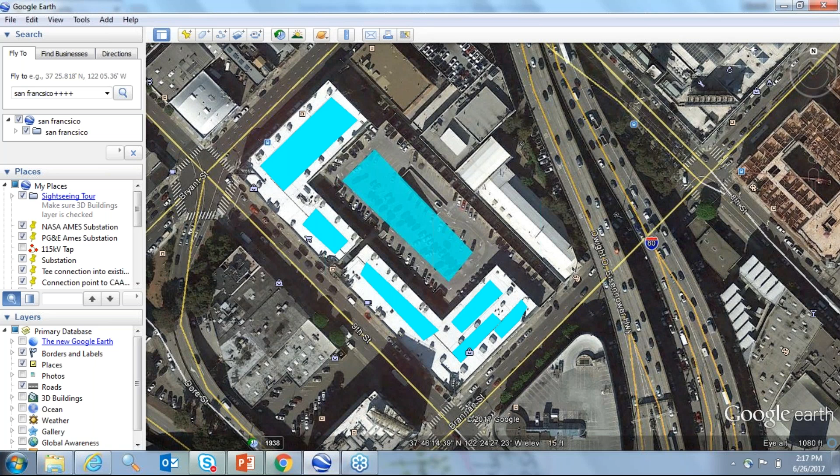So back to the tool, I picked an office building here in San Francisco. So I pre-measured this roof, and it's about 6,500 square feet of total space, but we can fit 3,000 square feet of PV space here. So I simply enter 3,000 there. And I've done the same on the parking lot, and we have 5,000 square feet of suitable PV.

So the next thing we need to put into the tool is, how long do I want this facility to be off-grid for? So how long of a utility outage am I designing for? A lot of the work we've done in San Francisco has been based on seismic issues. And typically, PG&E, the local utility here in Northern California and San Francisco, has done extensive studies to figure out, if the big earthquake happened, so if 1906 was repeated, with the current systems, how long would it take to restore power to San Francisco?

So the results from that survey and that work: it takes between 1 and 7 days for most people to have power restored. So after 3 days, 60% are restored, and after 7, 97% of the city is restored. So that's very different to gas on the West Coast. Seismic is our risk here, and if there's a seismic event, gas can be out anywhere from 1 month to 6 months.

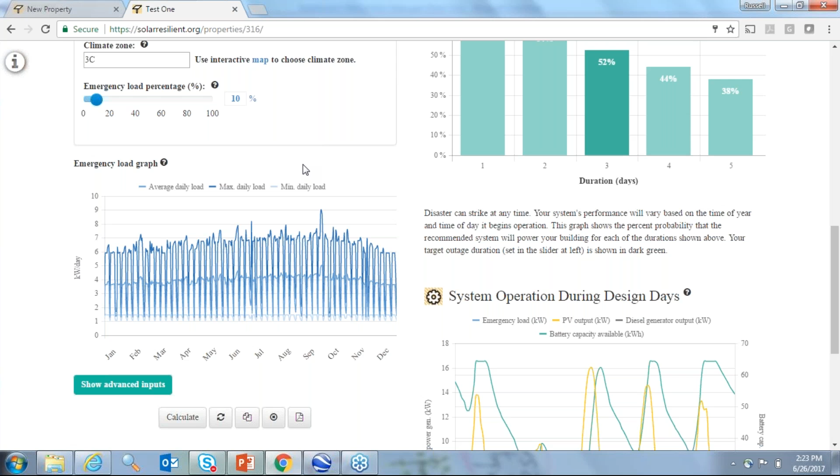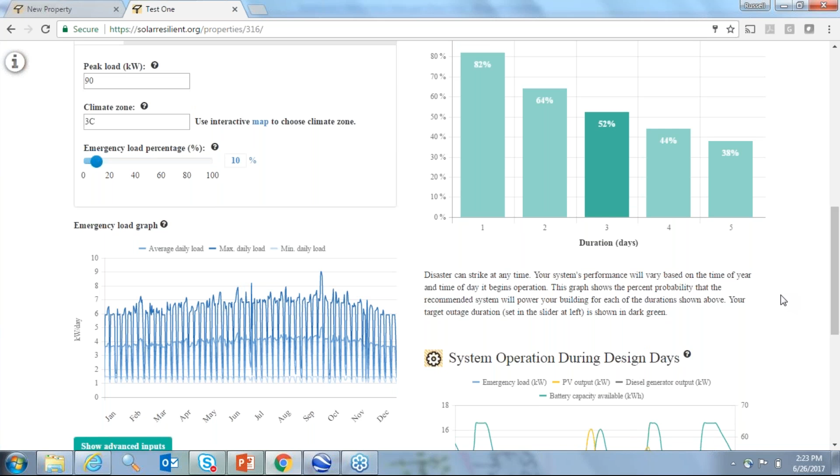So we have a 90 kilowatt peak load. So unsurprisingly, we've said we want a 10% emergency load. Look at our peak load here, we've got 9 kilowatts. So we have 9 kilowatts of emergency load. Varies between a peak of maybe 6 to 9. So what the tool then does is it looks at the energy that we have for 3 days, because that's the outage duration we selected, and ensures that the battery and the solar provide power to that.

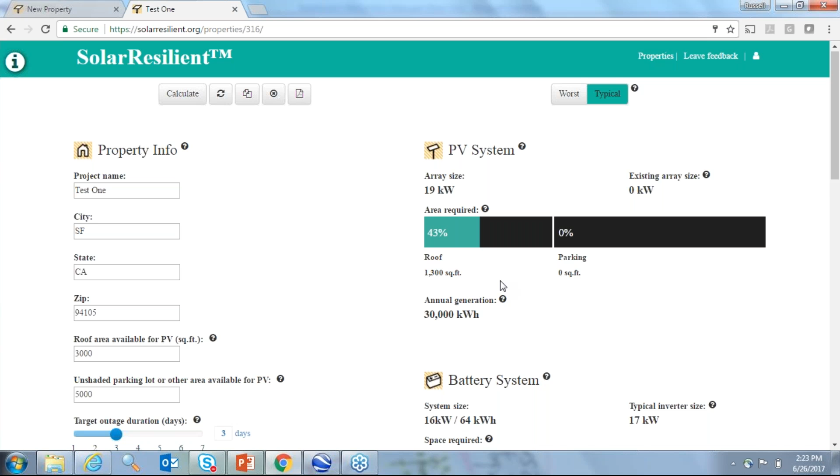So you see here, with these parameters, the tool is saying, I need a solar array of 19 kilowatts, and that 19 kilowatt solar array is going to take up 43% of my roof space, but no parking space. And it's going to generate 30,000 kilowatt hours of energy per year. It's then saying I need a 16 kilowatt, 64 kilowatt hour battery. So this is a 4-hour battery, which is common in lithium.

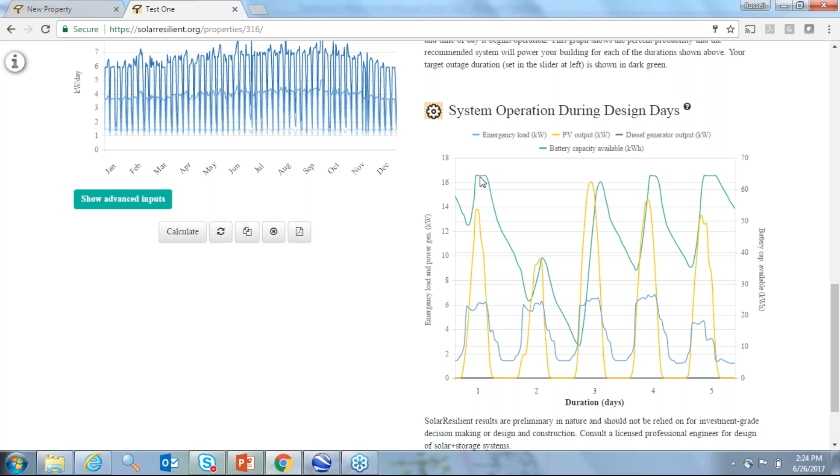And if you look at the bottom output graph, the blue lines you can see on the graph is the load of the actual building over this 3-day outage. The yellow spikes is the solar irradiation, so in the day. And then the turquoise or teal line is the battery capacity. So on day one, the battery is charged, and it discharges pretty heavily for the first 2 days because it's not a great solar day. And then it charges up again and continues to operate.

So there are 2 ways that we size the solar and storage. The first one is what we call a typical array, and this is what's probably going to be used most. What this does is it adds up all of the solar irradiation hours in the year, adds up the physical electrical load that we're designing for in the year, and basically finds the average point of these 2 systems. So it takes an average day for solar and an average day for load. And then we say we want at least a 50% confidence factor that the solar and storage we're providing will provide power to the loads that we're designing for.

So this is fine for a shelter. If it's a shelter used for some task lighting, charging people's cell phones, this method is fine, and it won't oversize the system. But if you've got a real critical facility, just imagine we're looking at a dialysis center where you cannot have an interruption of power. If we're sizing solar and storage for resilience, we really do need the power that those dialysis machines need. So what we would do here is we would tick this worst case button.

So what this worst case button does is it looks at all the hours in the year, and it picks the worst days of solar irradiation. So we're effectively picking December 21. And it looks at the highest load that you want to provide power to. So worst generation, highest load, and then it'll size the system accordingly.

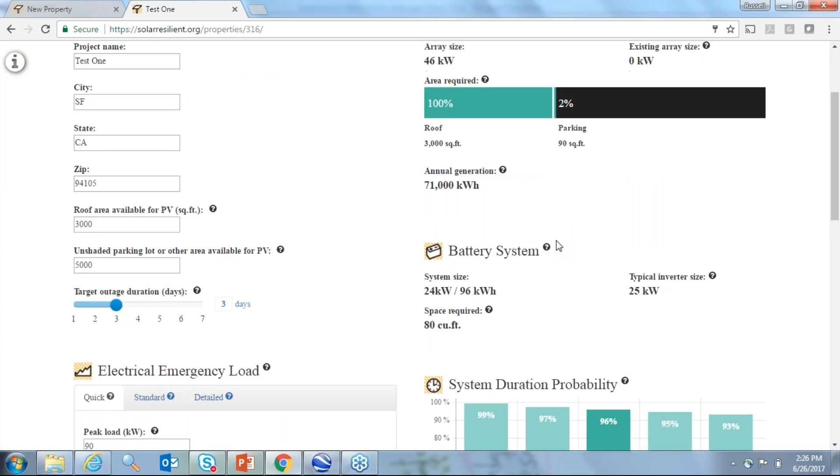So a bigger system. But now if you look at this system duration probability, this graph here is telling us how certain we are that we will be able to provide power to these loads. And you can see here, even after 5 days, we're still 93% confident. And the tool wants at least a 95% certainty that the duration that you select can be provided power for by the loads. So that's why the systems have gone much bigger.

So some of the other features I'll test are in the advanced tab. This particular use case is asking for a 19 kilowatt PV array. But what happens if I'm a building and I've got a 15 kilowatt PV array already installed? Now I can allow the tool to size another 4 kilowatts of solar like it has done, or I can tick a button saying don't add any more solar.

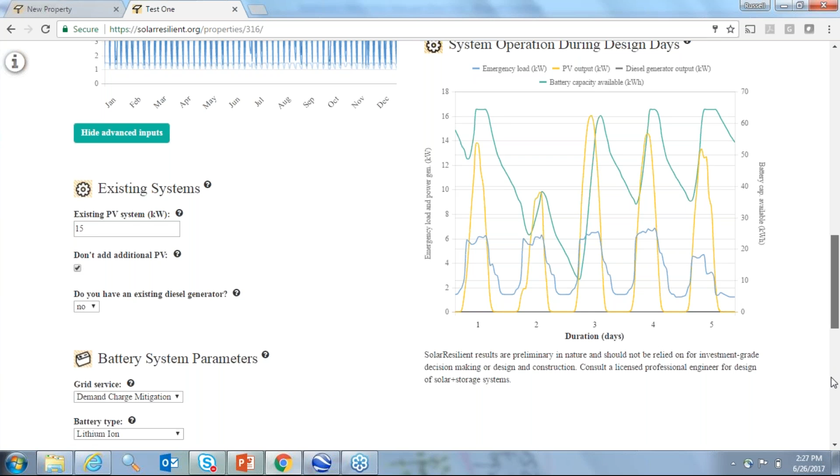So to add 4 kilowatts of PV is probably going to be an expensive project for the small capacity you are getting. So by clicking that don't add additional PV button, we're locking the tool to say 15 kilowatts is the maximum generation we are going to get. So what the tool does here is it upsizes the battery slightly. So it was a 90 kilowatt hour battery, and we've now gone up just over 10% to a 100 kilowatt hour battery. So it allows a user to very quickly play with a few tabs and understand if they do not want to install more solar, there are options for that.

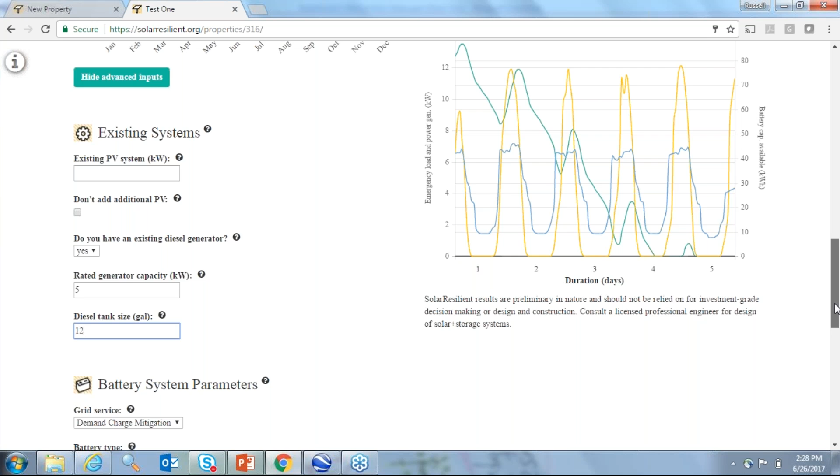Another thing we can demo is if the building has an existing diesel generator. So let's say this building has a small standby diesel generator rated at 5 kilowatts, so approximately half of the peak load. And let's say it has a diesel tank size so it can run for 24 hours at full load. So what the tool does here is rather than using all of the diesel in day one, the tool looks at the outage duration. And if I'm designing for 3 days off grid, what the tool will do is it'll stretch your diesel fuel out for multiple days. So you've always got some diesel fuel to fall back on.

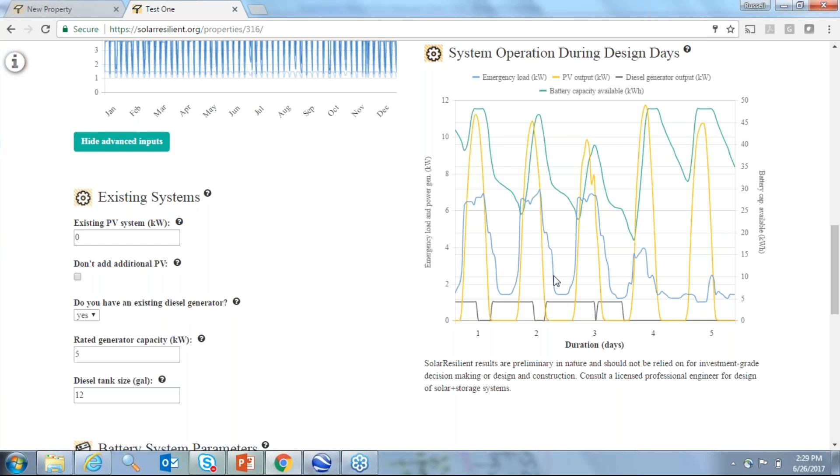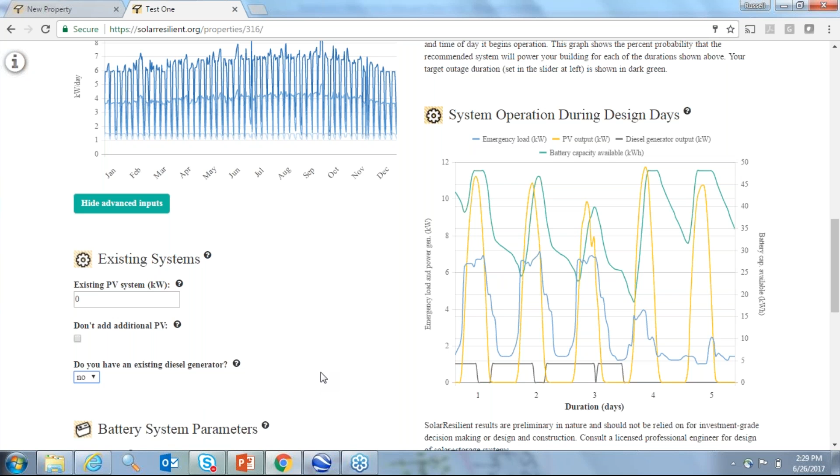So what this has done is now it's saying a 14 kilowatt array will be sufficient because we've got the diesel, and the battery is now reduced by half. We now need a 48 kilowatt hour battery. So again, it allows you to play with those components. If we look at the graph of how the system performs, you'll see that I entered a 5 kilowatt diesel generator, but it's running at a much lower capacity, and it's stretching the fuel out for 3.5 days. So again, it lets the building owner play around with how they want to combine solar, storage, and if they want to use diesel at all, then that can be built in.

We assume that if someone's going to install a battery, our default battery is lithium-ion because they're one of the most common batteries that people are putting in for a service called demand charge mitigation. So demand charge mitigation is effectively installing a battery at your facility to discharge in the peak electrical tariff period, so typically between 4 and 7, and reducing the amount that a user pays for demand charges. So it's effectively an economic play. There are companies that will install a battery for you for free, but they take a cut of the demand charge mitigation savings to pay for the battery, and you get the benefit of having the battery at no upfront cost.

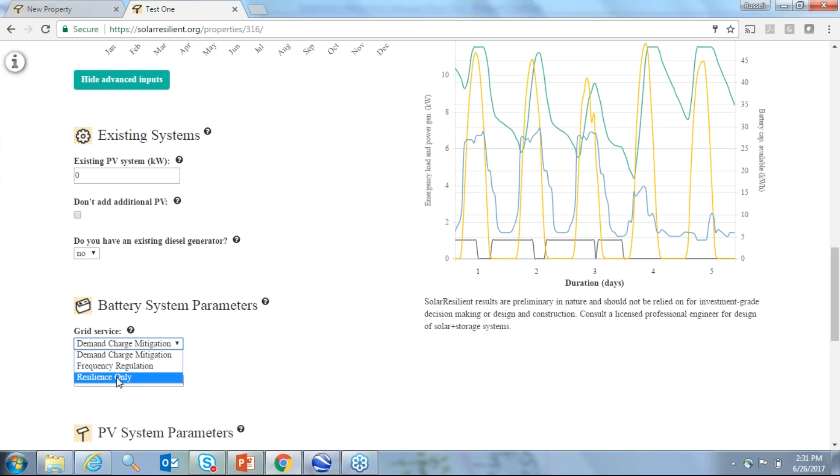So if you were doing a project with one of the San Francisco schools where they would rather have a lead acid battery, so more of a stationary battery that can sit there like we have everywhere on uninterruptible power supplies, and they don't want to cycle the battery every day. They just want to use the battery for resilience. So we can change the battery to be a resilience-only battery. And what you'll see is now the battery is 48 kilowatt hours. If I recalculate this, it will reduce the battery capacity slightly.

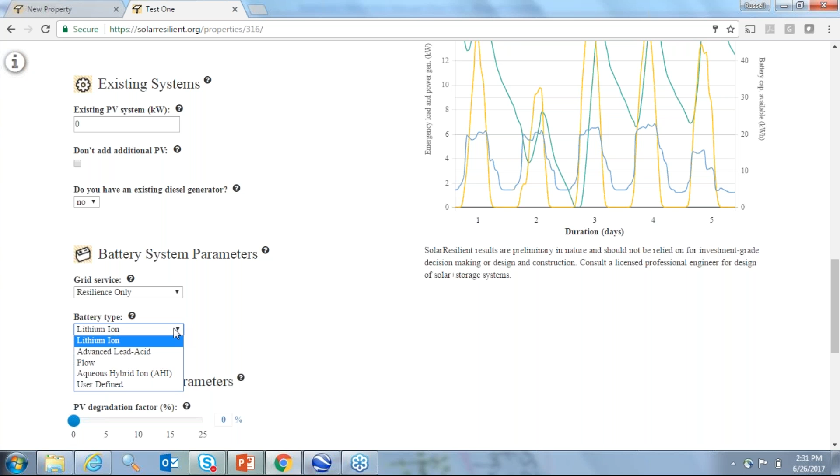And the reason it does that is if we're using our battery for demand charge mitigation, what the battery is doing is it's assuming that on day one of the outage, the battery only has 40% of its capacity left, because the battery has been used for demand charge mitigation and the battery has had its power reduced. If we put it in this resilience only mode, it assumes on the day of the outage that the battery is charged at 100%. So it just allows you to play with your battery sizing for the application that you have.

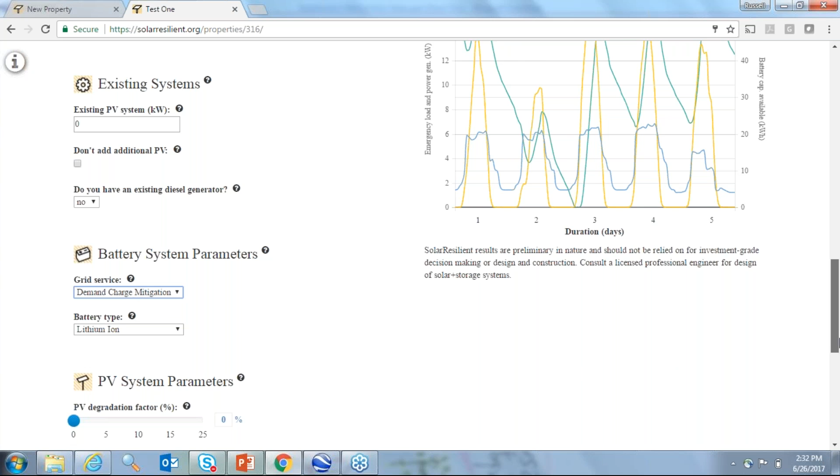So other things we can change in the advanced tab, we could say we wanted a different type of PV panel. So we could go for premium efficiency or thin film. We could have roof mount, we could put open racking, we could put tracking PV. We can change the tilt, we can change the angle that the PV faces. So is it south, is it west, is it east, or is it anywhere in between? And we can also change the system losses and the inverter efficiency. So that's the advanced parameters done. I'm just going to put these back to their default settings. So now I'd like to demo some of the other areas that we have for electricity.

So most people will be able to get their electricity bill from their utility. So they'll be able to download in an Excel file or a CSV file what their either hourly or 15-minute energy data is. So if you have your individual building's energy data, you can click on the standard tab here.

And what this standard tab is doing is it's looking at somebody's utility data. So there's an example file here on the website that somebody can download and then compare to their own. So all you have to do is click Choose File, click where this file is located on your computer. So it's just a CSV file. And what this CSV file will contain is for every hour or every 15 minutes, it will have a kilowatt value of your power consumption.

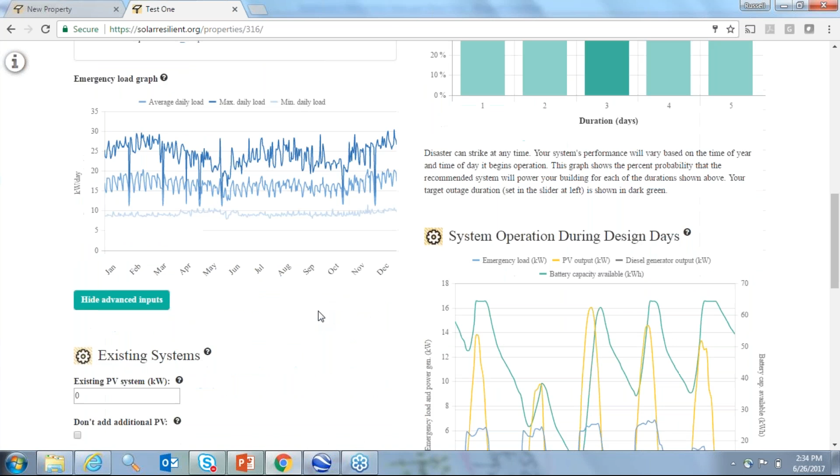Now, if we scroll down here, we can see the graph has changed. So this graph has now changed into what you'd expect for a kind of typical electrical profile. So this profile I've downloaded here is from a school. This graph here displays your emergency load percentage. So let's say for this particular building, we want to have 20% backup power. So if I up the slider to 20%, and click recalculate.

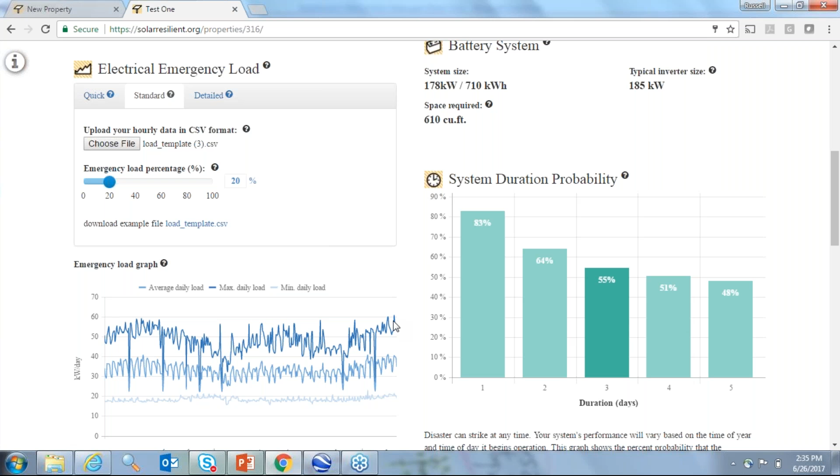So this will now, rather than using that standard profile from an office building, use your actual building profile to make these calculations. So I deliberately put quite a high value there. So you'll see at this graph here, I'm now saying we have an emergency load profile of a peak of 60 kilowatts, which is a fairly large peak. But we've only got a 3,000 square foot roof, which is quite small. So now you'll see the tool has some red warnings.

So what this is saying is I need 180 kilowatts of PV to be off grid for 3 days and to provide 20% of my building load as emergency power. So that would take up 100% of my 3,000 square foot roof and 310% of my parking lot. So it needs 15,500 square feet of area. So obviously that's saying the building is constrained by area here.

So the tool recommends a few options to rectify this. So either reduce your outage days, increase the area available for PV, so either free up more roof space from mechanical equipment or allow more of the parking lot to be used, or some other area such as a greenfield site next to your particular building, or reduce the electrical load. So I'm just gonna reduce the electrical load. So I'm gonna pull this down, let's try it at 10% and recalculate this.

So just what we're trying to demonstrate here is it's very easy for somebody who has some knowledge of the building and the area to click a few values to change these tabs and try and get a suitable size. So I haven't got this quite right. It still says we need 92 kilowatts of PV, which is 4% over the space that we have. So if I take this down to 9% and then click recalculate again. So very quickly, you can hone in on a size that is suitable for your particular constraints on site without having to go to a lot of work.

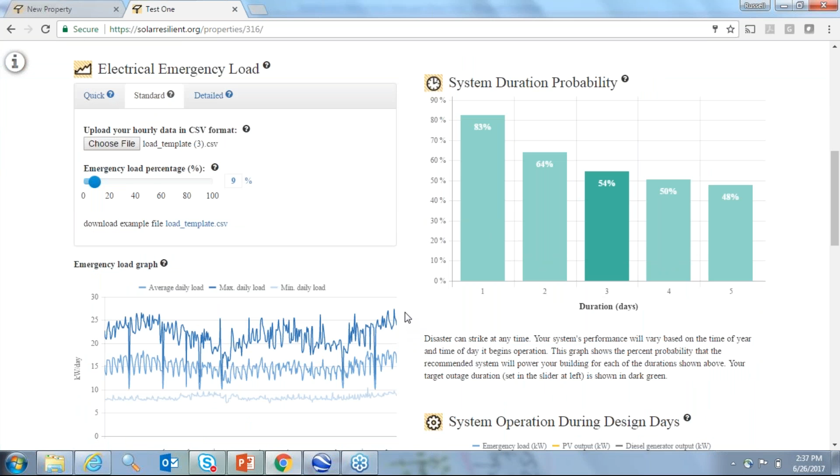So there, this has found a solution. We've got 9% emergency load, which peaks at probably around 27.5 kilowatts of load. And now we're saying we need 83 kilowatts of PV, which is 100% of my roof and 84% of my parking lot. So that's going to generate 127,000 kilowatt hours of clean energy a year. And the battery size I need is 80 kilowatts, 320 kilowatt hours. So not such a big system on the battery, and one that's in most manufacturers' size ratings.

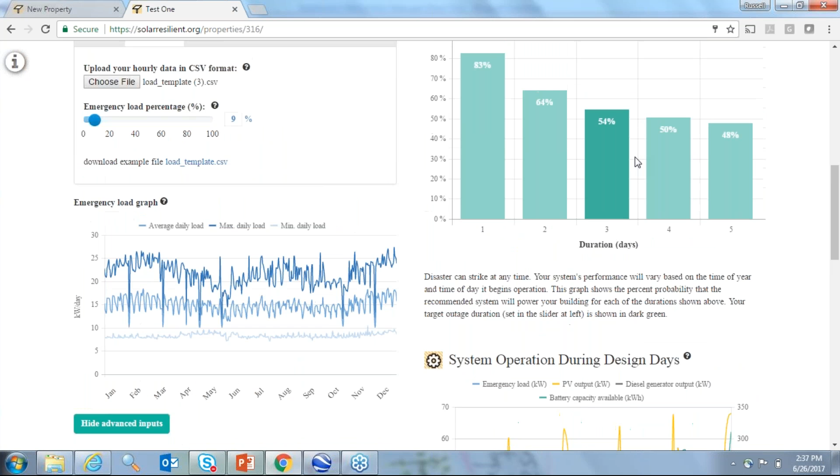So the final way to put load in is the way we've been using it most here in San Francisco. So the buildings that we've been looking at have been primarily buildings that are going to be used as part of a disaster preparedness plan. So it's primarily sheltering or evacuating members of the public in the city that can't shelter at home. So these are rec centers, schools, churches, and these types of buildings.

And they have, as I said earlier, a very different use case than their normal operation. So a school may normally have 1,000 children in many, many rooms throughout a 3-story school. But perhaps in a shelter situation, we're only using one of those floors of the school, and we're perhaps using 4 or 5 rooms in that school.

So maybe 2 classrooms, maybe the cafeteria, an auditorium, and a gym. So very different to normal operations. So what we've been doing with the Department of Emergency Management in San Francisco and a facilities engineer is walking the particular spaces of a building that are going to be used for an emergency and doing assessment of, in these particular rooms, how many lighting fixtures do they have, how many people would shelter in this space. And then we build up a profile of how that building is going to be used in an emergency.

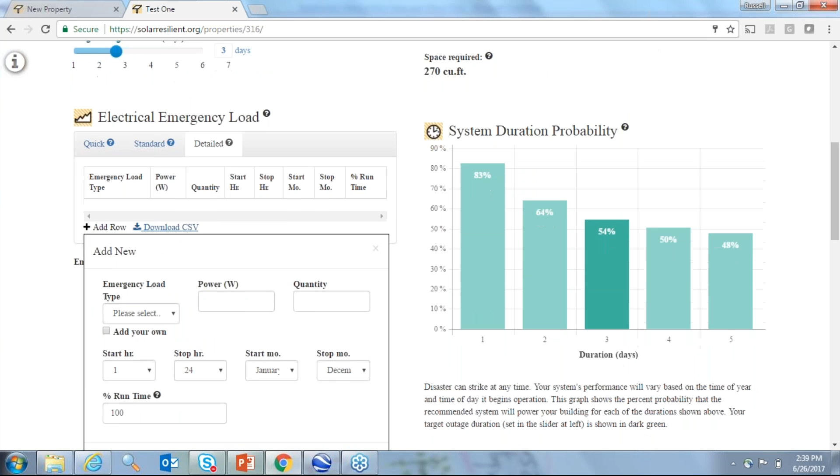So that's called the detailed tab. And on here, what we do is we add individual loads, kind of row by row in this assessment. So there's many, many loads that are already populated in the tool. So we have ADA, we have some comms, we have heating, ventilation, and air conditioning, we have lighting, plug loads such as coffee machines, laptops, DVD players, TVs, some microwaves, cell phone and iPad and tablet charging, printers, a whole thing. Everything from this list is things that we have found have been needed in different shelters in San Francisco.

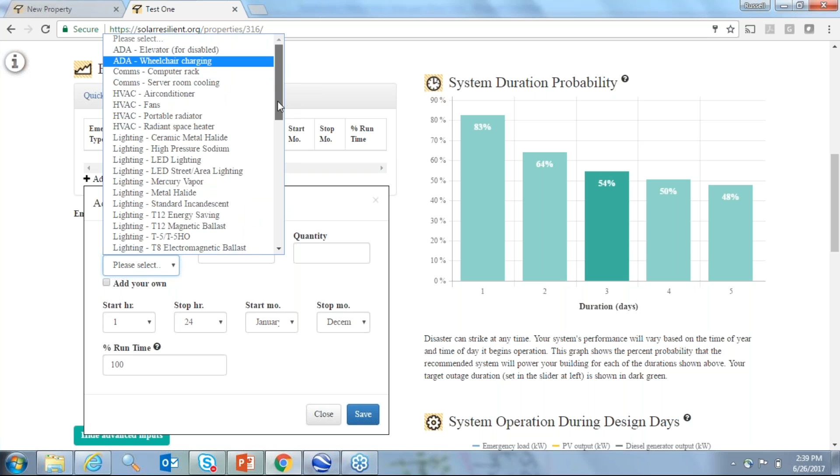So if I click on LED lighting, it auto populates the power of that fixture. The user can obviously edit this, but it's just a good placeholder to get them started. Then a user just needs to enter the quantity of these devices that they have and how long they will operate per day, and is there any seasonal variety. So perhaps if you've got an electric heater, it's not going to be used in the summer. And if you come across a building where the load isn't pre-populated in the tool, you can simply click add your own, then add your own in.

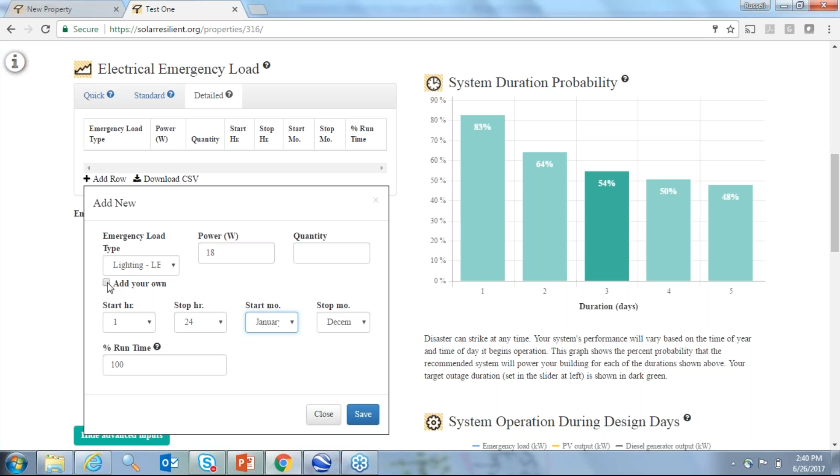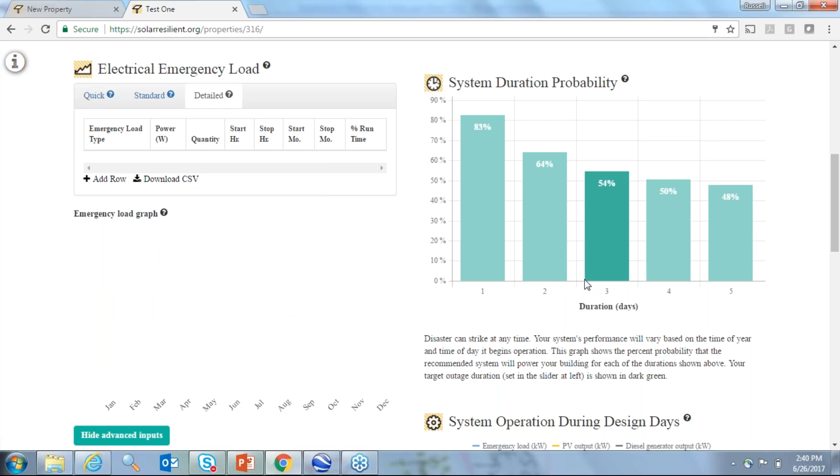So this is the detailed assessment, and it takes about 15 minutes to enter this once you've got all of the data from the site walk. So I'm not going to spend 15 minutes going through that now. I'm just going to demo one that we've done for a school in San Francisco. And this is called Thurgood Marshall School. So I'm going to click on this particular building, which is saved in the tool under my profile.

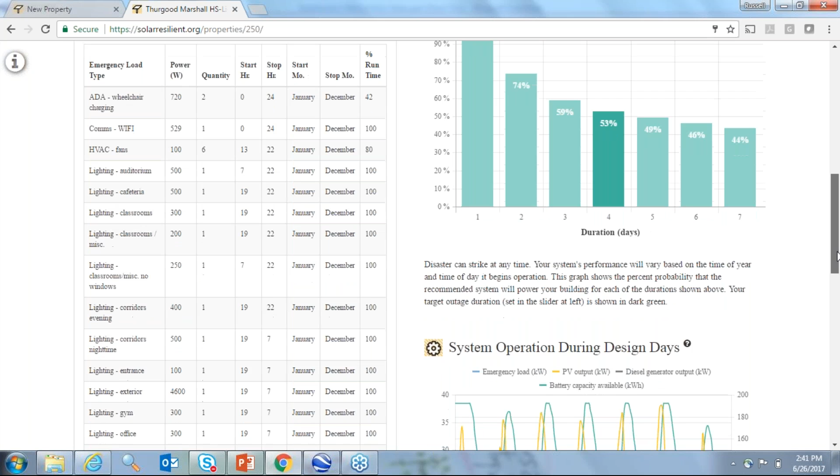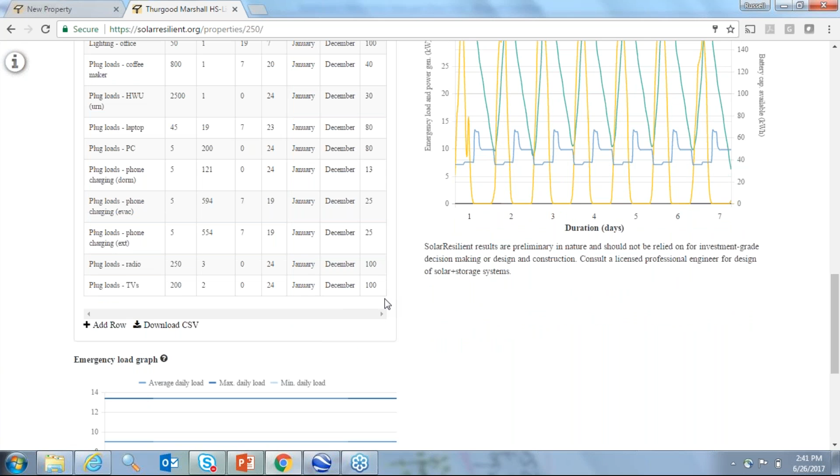And what you'll see here is in the electrical emergency load, we have a whole list of loads that are required for this particular building. So we have Wi-Fi, we have some electric wheelchair charging points, we have a lot of lighting in the auditorium, the cafeteria, the gymnasium. Then we have plug loads, we have some coffee urns, laptops, some PCs that city staff will be using to coordinate the disaster response effort. We then have some phone charging, some radios, and 2 TVs. So TVs primarily being used to allow people to keep in touch with news, events, and what's going on in the city.

So you just enter all these loads in, press calculate, and exactly like the other demonstrations that I've shown, the tool will spit out the size of the PV array for those loads and also the size of the battery.

So one of the questions that we've been asked is, does this tool do any economic analysis? So we stayed away from doing any economic analysis, primarily because this tool is a tool to be used in all 50 states in the US. And each state can often have many utilities. Each of those utilities, and maybe municipal utilities, all have different rates, different demand charges. So there was no easy way to make a tool within the budget that the DOE allowed to have economics in as well.

So how we see this tool being operated is this tool will be used for the user to actually understand if solar and storage is right for them in the particular climate that they are in, where their building is located, and for the particular electrical emergency loads that that user has. Then we see this tool as a user would click on the download PDF button. Now this then spits out a nice one-page summary of the tool output. So basically the concept design.

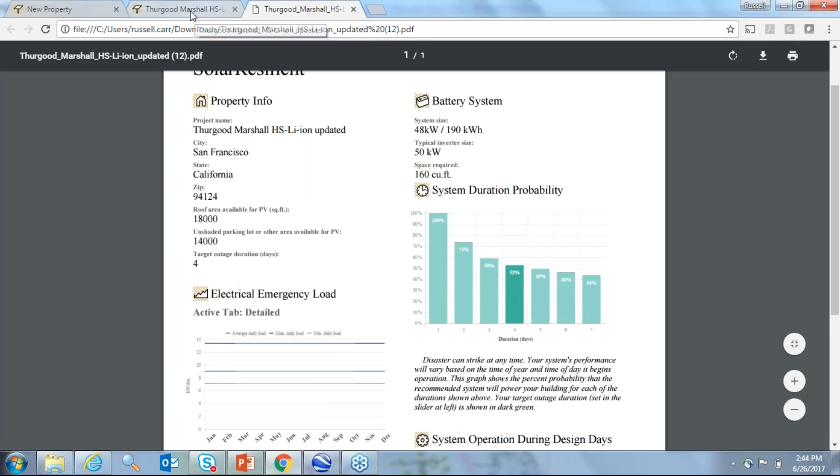So I think they were the main features of the tool I wanted to demo. I think we've got 15 minutes left and we can answer any questions that have come up in this time.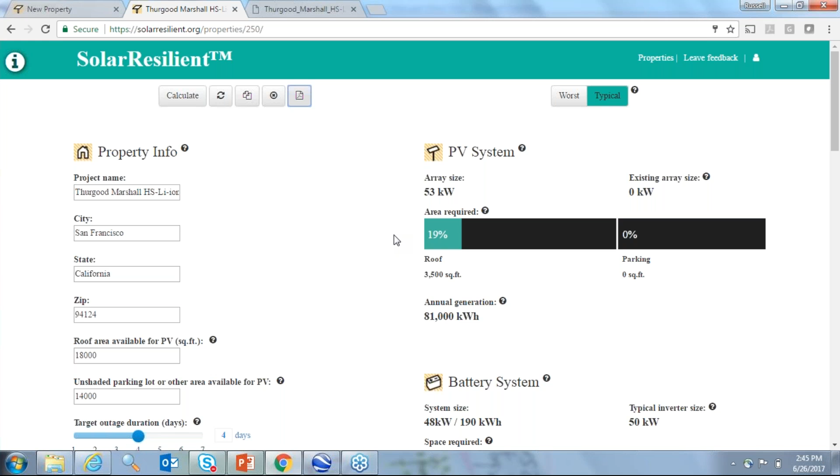Yeah, sure. So most utilities allow you to download. I can download my apartment's electricity bill. So I can get this standard tab here. It's called the green button in California. I'm not sure what it's called in other states. But I log on to my utility account, I say download data, and then it sends me a CSV file that I could upload to this tool straight away. So that would be one way of doing it.

Another method is if you can look on your utility's website, your particular account, it will often give you either a line graph or a bar chart about your consumption. So if you could have a look at your monthly consumption and what's the biggest line in the bar chart that month, you could use that number as that peak number.

Okay, great. There's another question about zip codes, and you've mentioned that this tool is useful all over the United States. The question was, are all zip codes already preloaded for California? Are they loaded for the rest of the United States as well? And do they correspond to climate zones?

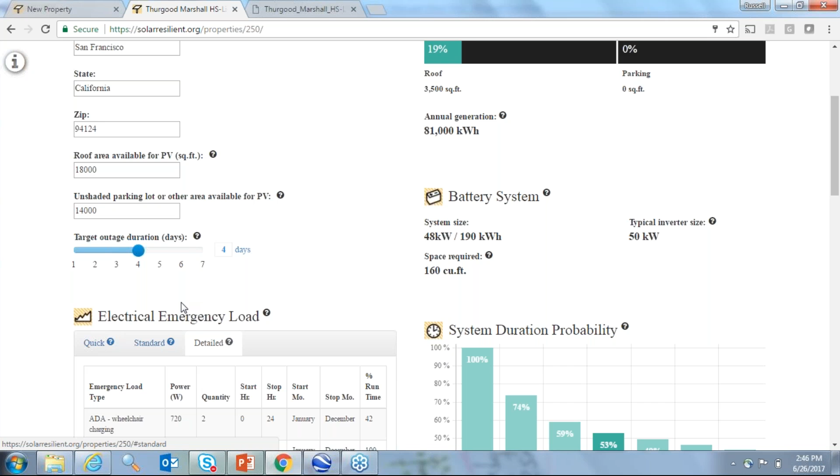Yes, so how this tool works is when we enter this zip code here, that zip code basically looks to another website, NREL's PVWatts, and pulls up the solar irradiance levels in that particular zip code. So there are no zip codes that are preloaded into this tool. Any zip code anywhere in the USA, you type the zip code here, then it pings that zip code to PVWatts and pulls the PV data from that zip code.

And we're also going to extend that, it's going to be a zip/postal code soon, so it can be used in other parts of the world as well. But there's no preloaded zip codes in the tool. It calls a solar website to calculate solar irradiance.

Okay, great. Last question so far, and I would encourage listeners to send their questions. And this is a technical question. For 2-axis tracking solar systems, what parameters should be used for angle and tilt?

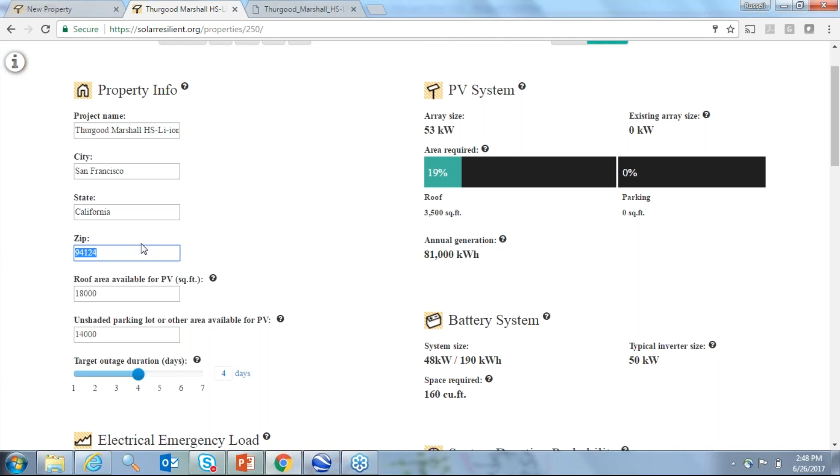Then it pings it back to this tool, and that's a great website that again was funded by the DOE. It's maintained by the National Renewable Energy Laboratory, funded by the DOE, and for most people doing a quick solar assessment, that's the go-to tool, which is why we've used it for this particular website that we've developed.

And thank you. And aligned with that, there's a comment from someone who says, it appears this tool can be used not only for emergency planning purposes. Is this true?

So our grant was primarily concerned with solar and storage for resilience. But there's no reason why. One of the other use cases that we've been getting a lot of questions for is: imagine I am a particular building and I want to go net zero with solar and storage. Can this tool calculate what size PV system I need and what size battery I need?

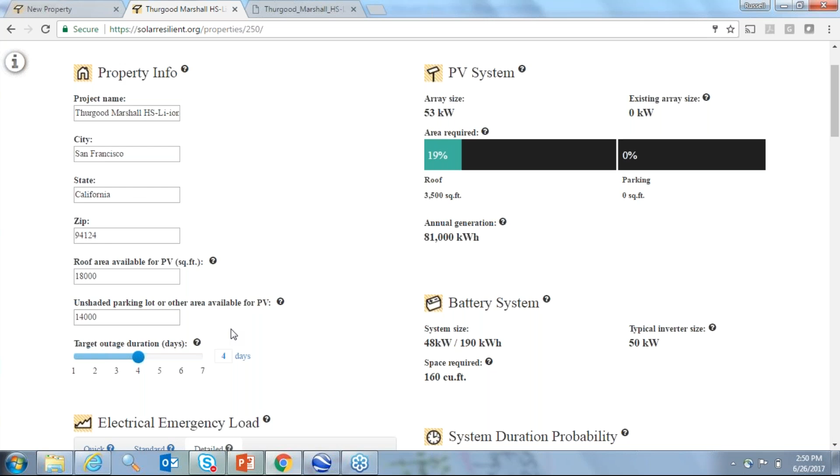So you could upload your electricity data in any of the ways I've described. You could say, I want a 1-day outage, because for every 24 hours, I want to assume that I can provide 100% of my load. And then on the emergency load slider, you put this at 100%, then you're effectively saying, I want to size my solar and battery to pretty much make myself net zero. So that's another way people have been using the tool.